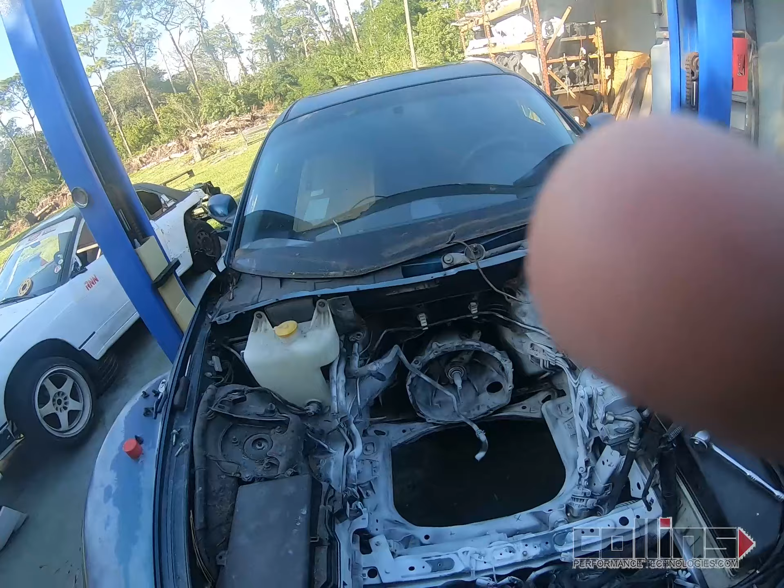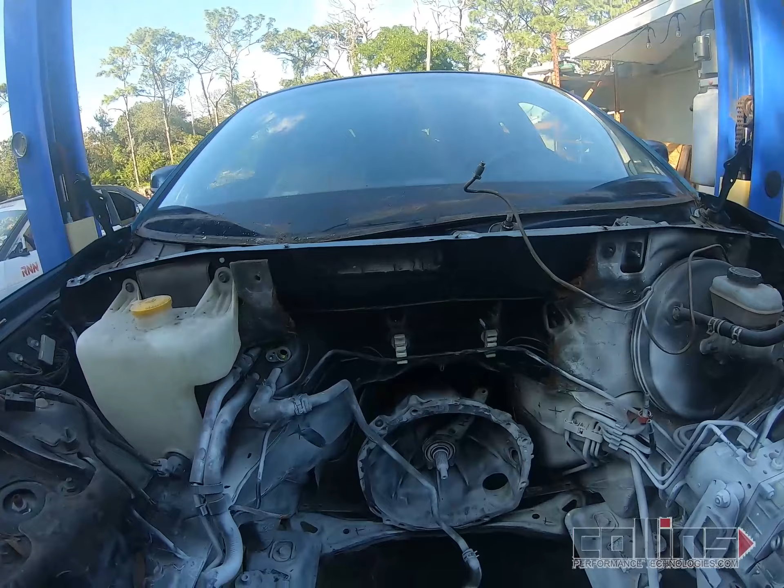All right, now that that's off, we're gonna go ahead and transition to this heater hose right here. And then once that's off, we're gonna go ahead and knock out these little guys right here and pull those off. Probably cut these studs off right here with a little wire wheel, or see if we can back them out from the other side, and then go from there. We're gonna just see how much of this area we have to kind of

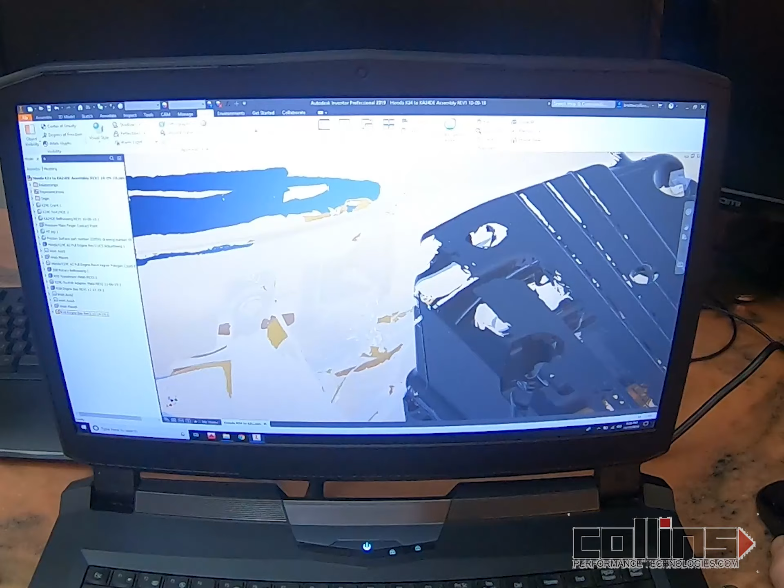restructure. This part is what I was just showing you in that last video, and the hammering of the firewall, we have to go ahead and cut. This is the brake line right here, don't worry about that. But the firewall, we're gonna go ahead and bend down, or hammer down that tab right there. We're gonna cut a little bit of it to trim it just slightly.

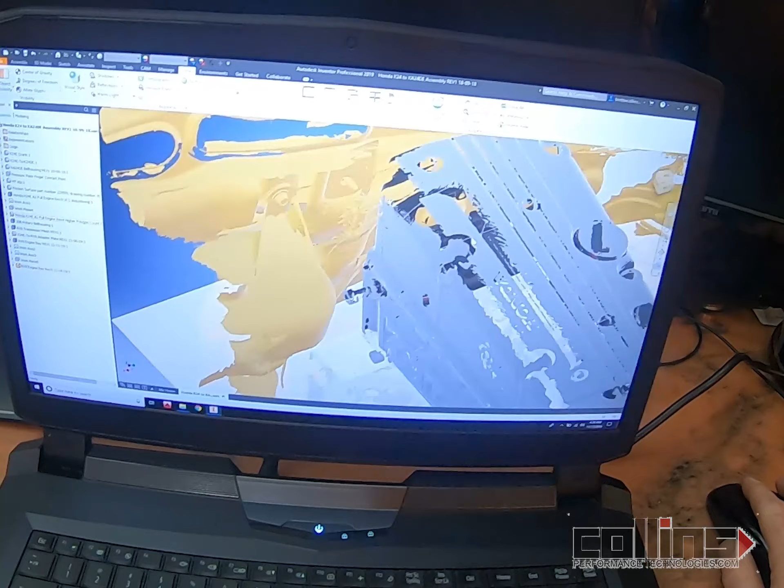We cut some of it right here on the back, behind the motor, but we didn't cut enough, so we're gonna cut a little bit more, maybe like 2.5 inches over. Once that's cut off, we're gonna hammer up and then basically fold the tab back down to kind of secure it in there and keep that firewall kind of sealed up. So once that's kind of hammered over, we'll show you how much more we're gonna have to hammer.

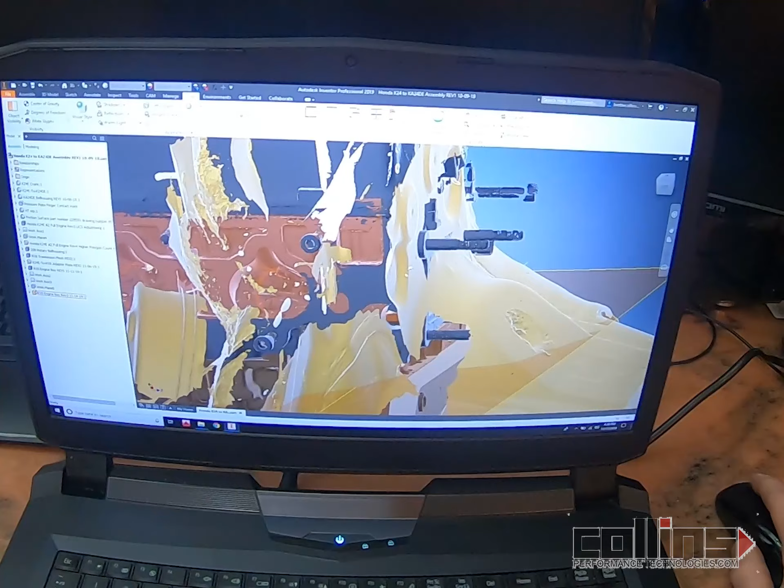So if you look back here, you can see this essentially is the surface of the firewall. We're gonna have to go in about 1/4 inch in order to get the clearance for that sensor right there. So just a little bit of hammering on the back of the firewall.

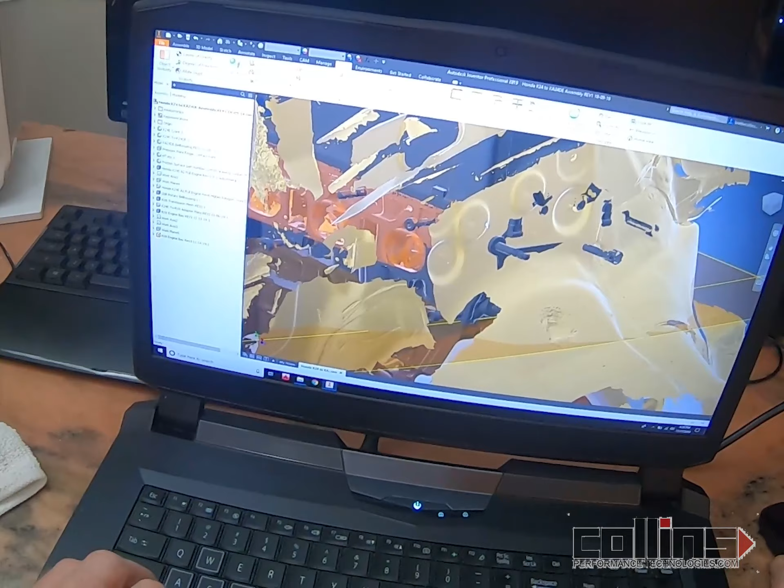This is basically a negative of the firewall. We're looking at it from the inside of the vehicle, but this is essentially the skin of the firewall. There's no thickness to this. So what you're looking at is what we have to do in order to get the sensors to essentially fit.

So just a small amount of hammering in order to get that to fit correctly, and then we'll go ahead and reinstall this whole system into the vehicle correctly. I'll show you guys what to do. All right, try to get it multiple times.

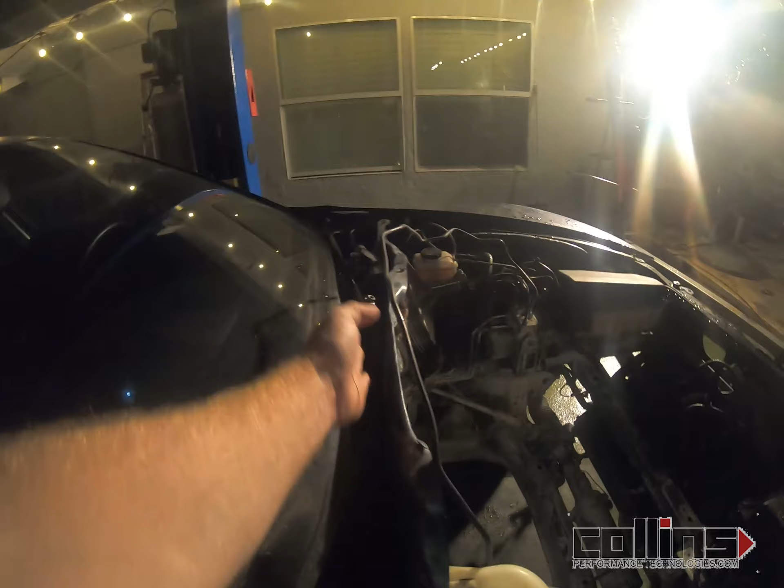It's being held up by this, this is like the wiper area where the wiper motion kind of articulates. There's also a little plastic piece that kind of goes in here to block the fresh air intake from getting water in it. It's like a little plastic piece that goes from like here to here. We're gonna try to keep most of that intact.

We might kind of get close to it, but we're definitely gonna cut this part of the chassis probably from right about here all the way over to right next to this bolt-on piece right here where it fastens on the insulation. We're gonna cut right there.

I'm gonna try to avoid cutting the brake lines, obviously, but we definitely need to go all the way down and kind of come all the way across here, and then kind of come back up, and then pull all that out. Cut the back portion of this off a little bit. I showed you in that last part where to cut. This is the passenger front brake line right there, tucking it under.

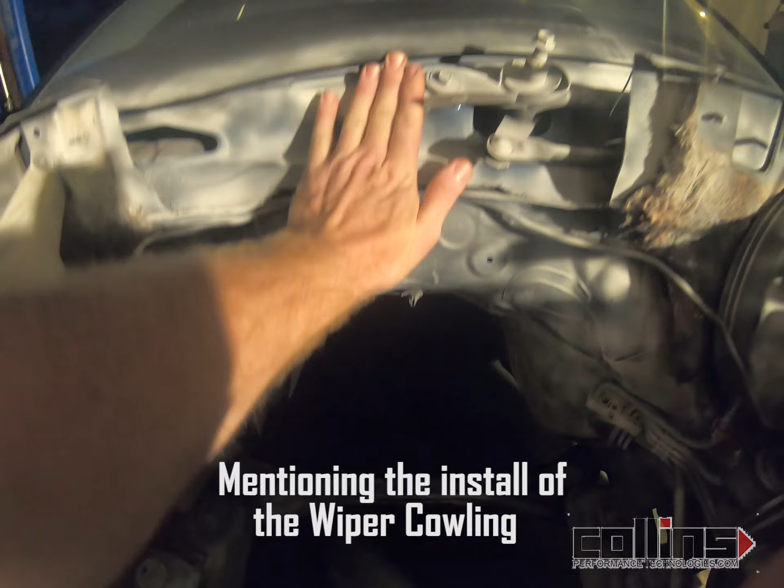When we go to install, what I notice is the top of the motor kind of hangs up right here, and it makes it really difficult to go down. It's also touching the front part of this, so we might actually cut this right here or notch it a little bit in order to get more clearance. So we might come down. I'm gonna go ahead and try to do it one more time.

I'm gonna take all these markers out that I used, and then once I go to install it and I see where it's scratching it up, I'm gonna just start removing material until it starts to go in a lot easier. And then once we have that going in a little bit easier, we'll go ahead and set up a way of how we're gonna do this.

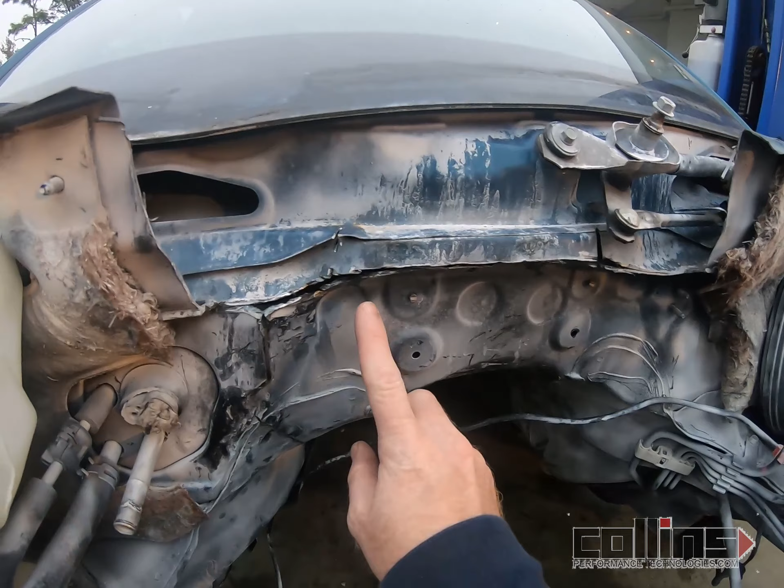I got this trimmed up a little bit better. What we're doing is we're gonna fold the bottom side here, we're gonna hammer it up into it, and then we're gonna fold this top part down over it. And we're gonna do this essentially all the way around. That way we can get a good seal, throw some seam sealer in there, and then we're good.

Basically, we're refolding this part of the front section. So we're trying to get this flat down, and we're gonna push this in, push this back just a little bit, like about 1/4 inch.

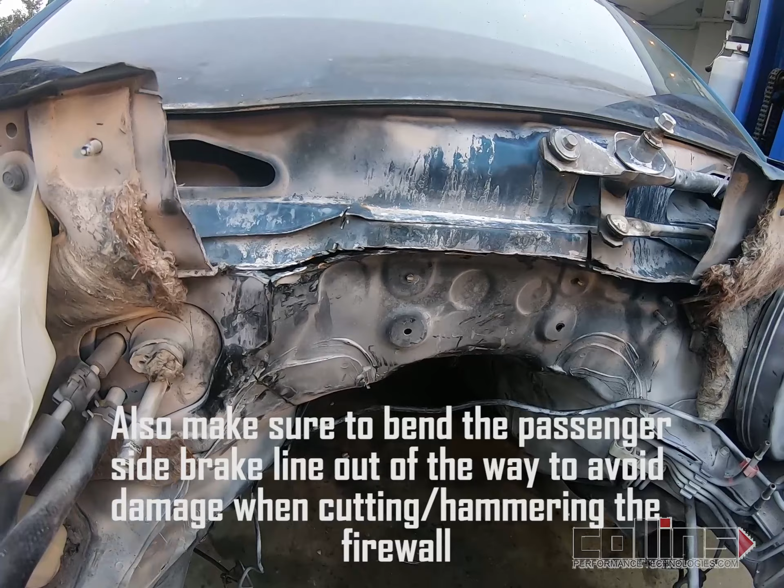If you look at that previous model, you'll be able to see I made a little score mark here with the grinder, ground down just a little bit to give it a stress relief. I didn't cut through it at all, just a little score mark, and also a score mark here. When we hammer in, it has some stress relief to kind of go back. So you'll see that once I start hammering. I'm gonna go ahead and put my eye protection, ear protection back on, and we're gonna start hammering this.

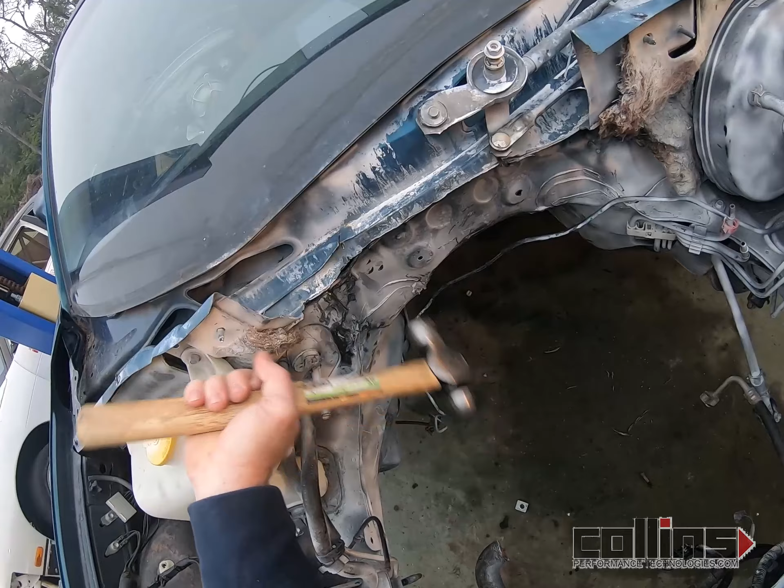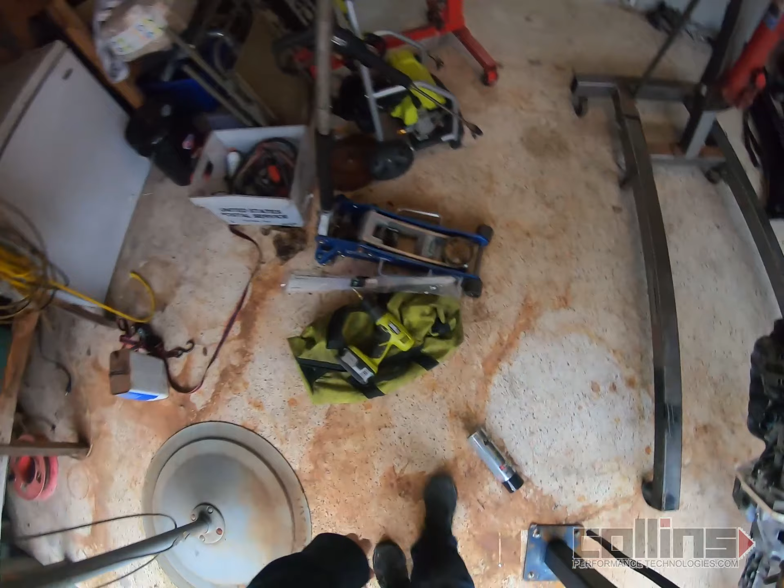Nope, no, no. Just bend this back out. A little tuna can operation here.

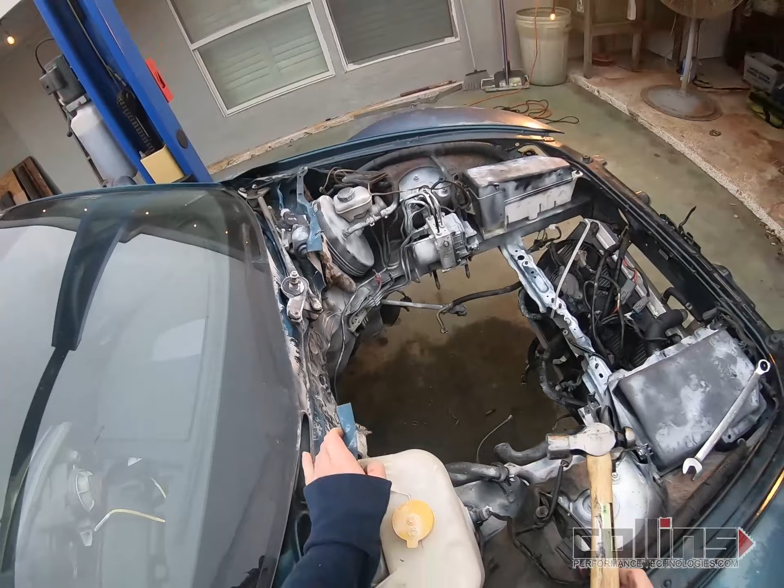Real close to where we want it. We're almost done. And then we'll be in a position to put this thing in. So, almost there. That's it.

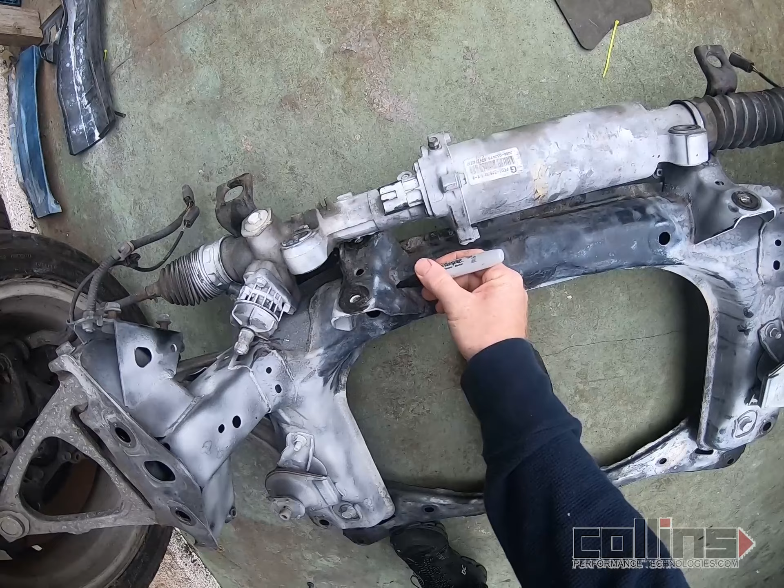Okay guys, hope you can see well. What we're gonna do today essentially is cut away the majority of this tab here. It's gonna be right down through here, and all that's gonna come off. See if I can make a good identical mark here.

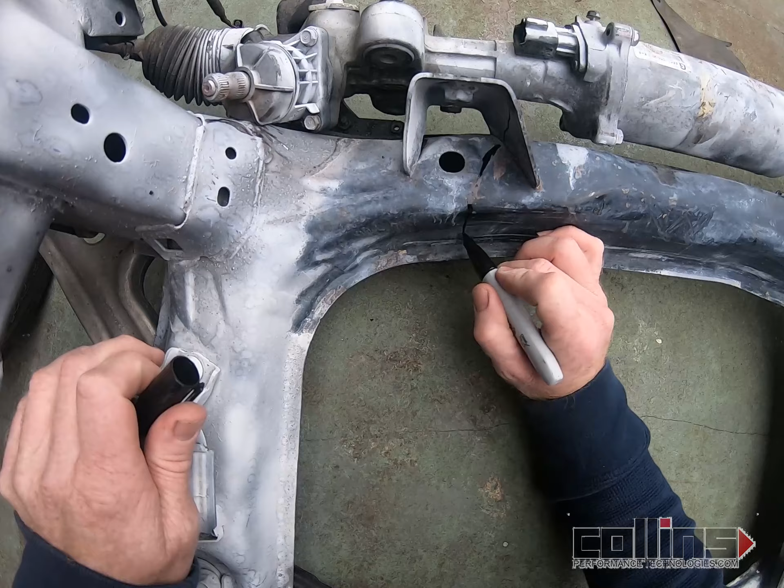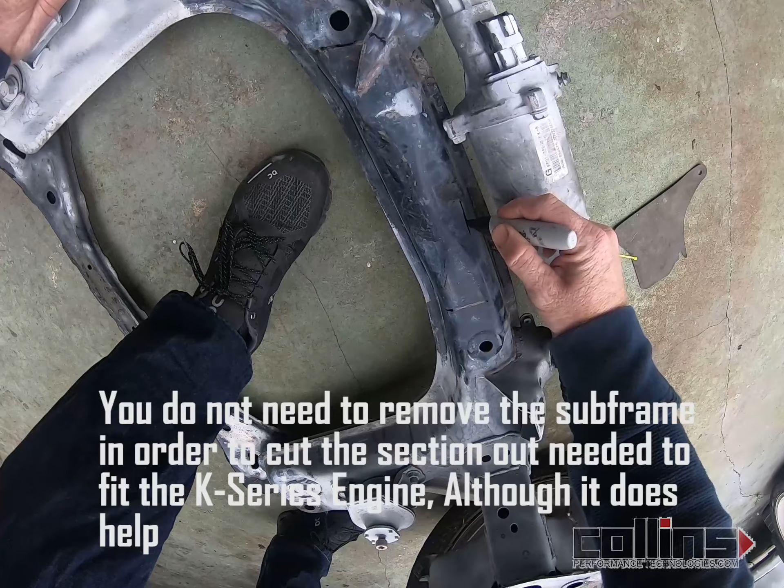Anyway, what we're doing is we're making way for the oil pan to come into this area right here. The oil pan is going to come almost all the way up to that little button right there, but it goes all the way down to here. It's going to go clear over to right about here. We're going to go ahead and take all that out, and it goes all the way forward to about right here. So it's not all of that, but we're going to take that out to show you how close it comes.

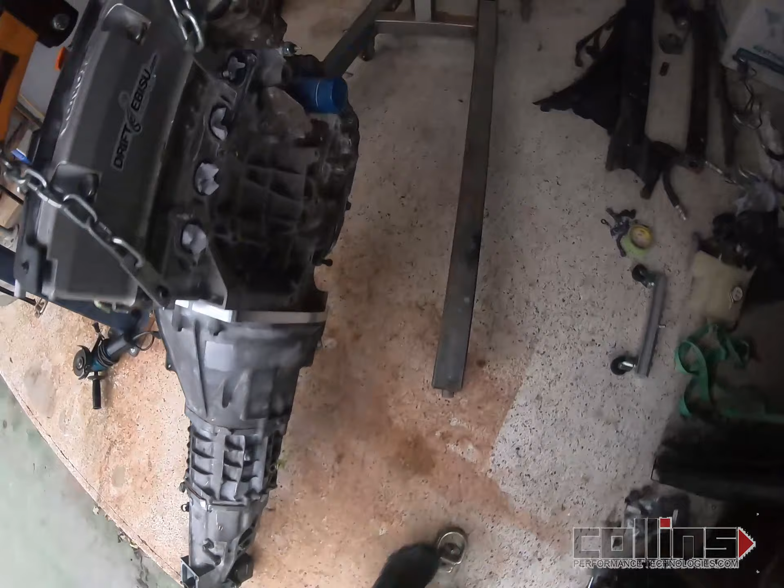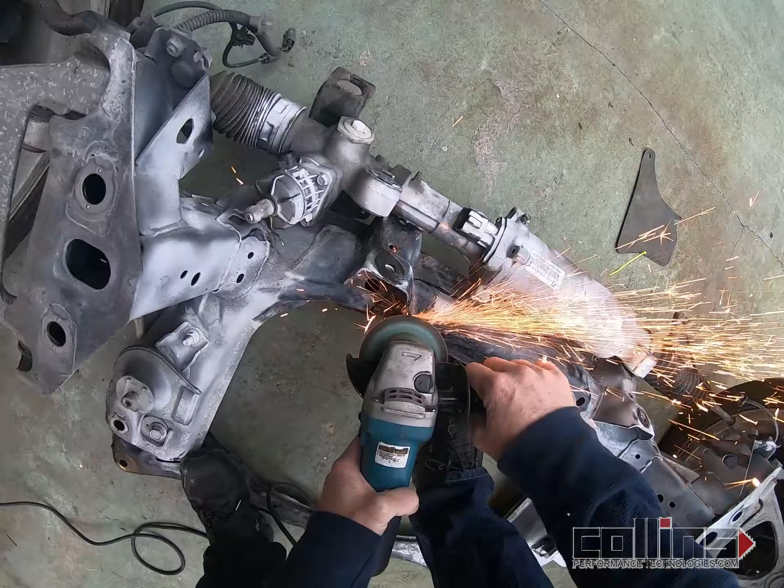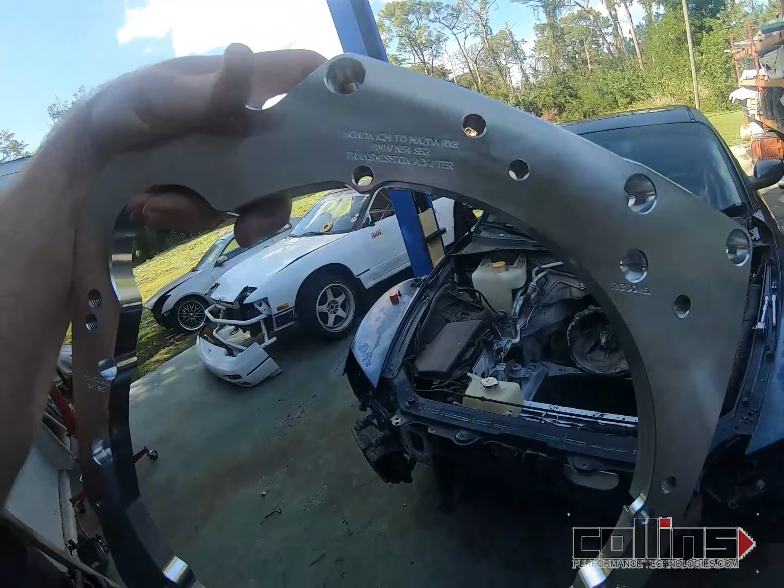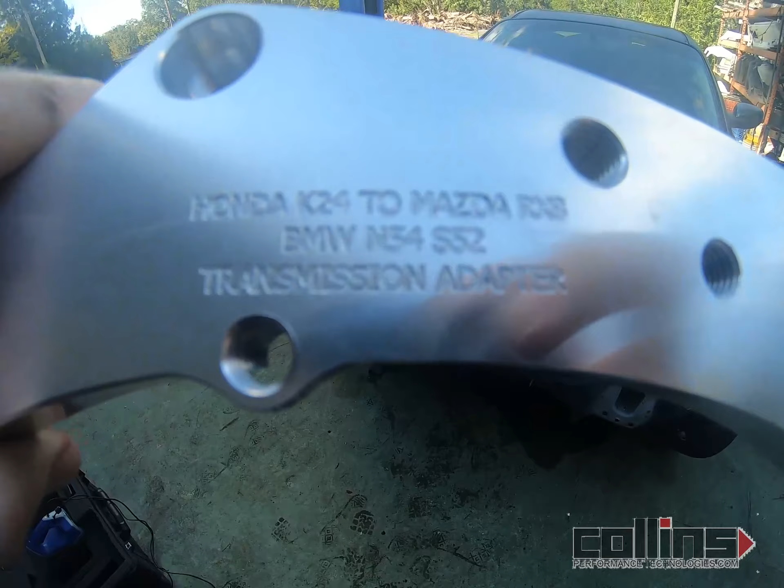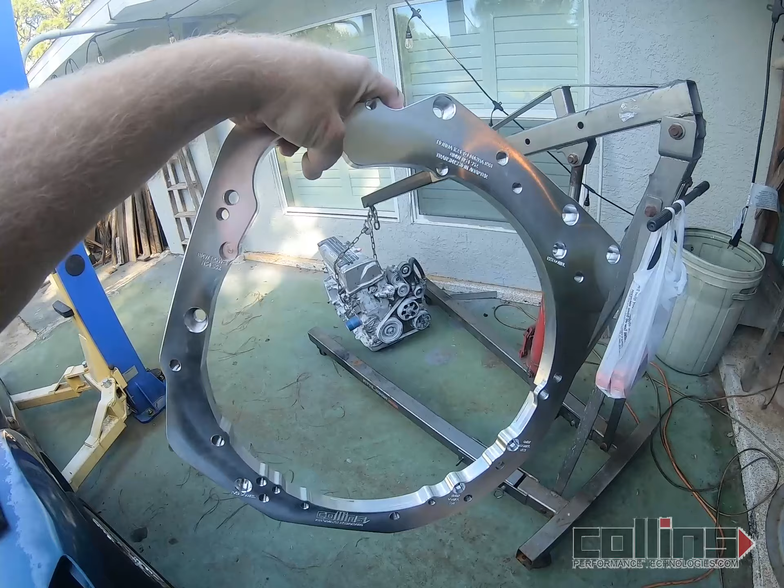In all its glory, we have the newest iteration. So this now allows another 3 transmissions to bolt up to this engine. So we got the BMW S52 and the N54 patterns on here, along with the RX8 stuff. So with that, we should have a way to do the majority of the rest of these swaps.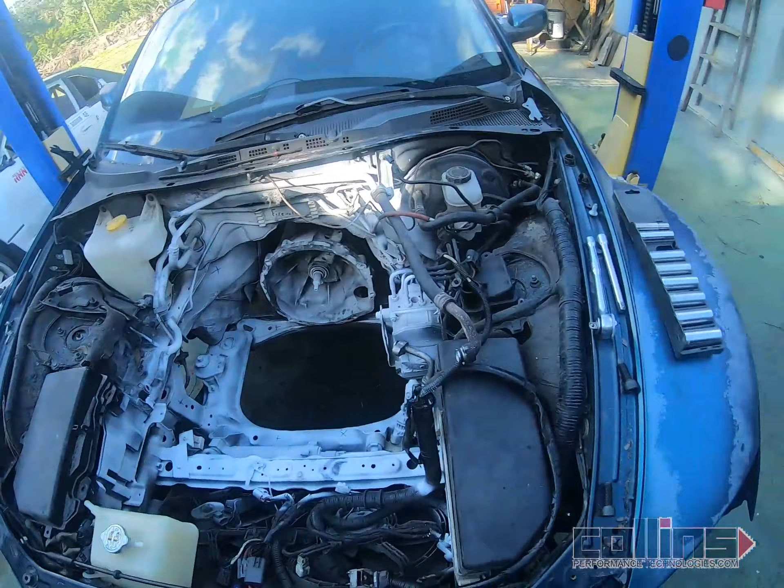So we're gonna go ahead and put this on the engine, and then pull the transmission back out, join those two together, and then we're gonna throw this thing back in here and show you guys kind of how it fits so far. Okay, so we're getting ready to drop this system in here.

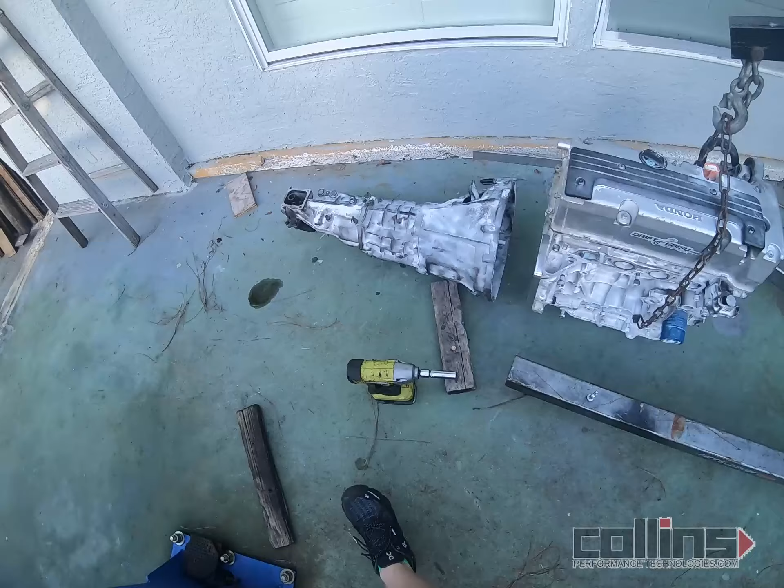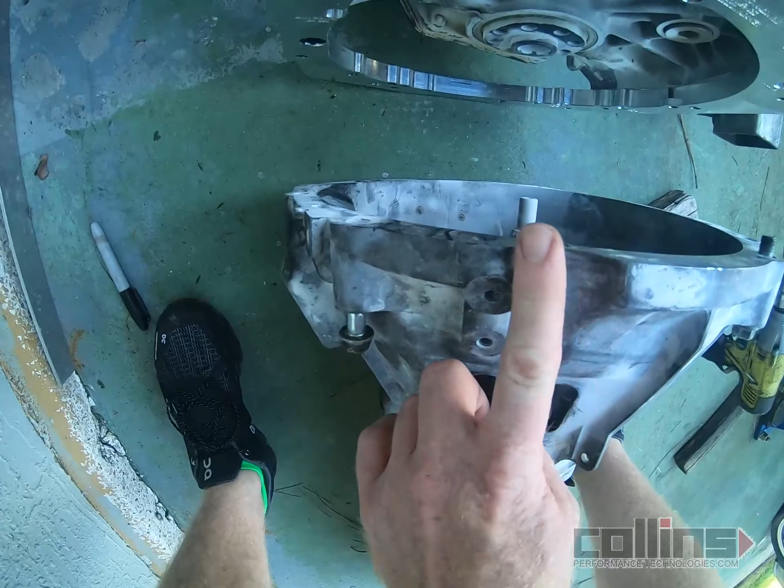I wanted to show you guys something about the modification of the RX8 transmission right here that you have to clearance for the starter. As you can see, the starter barely protrudes about 1/8 inch, maybe 1/4 inch at the most. I can get some raw data off of the 3D scan and double check, but essentially we need to remove a small section where this slave cylinder used to go right here.

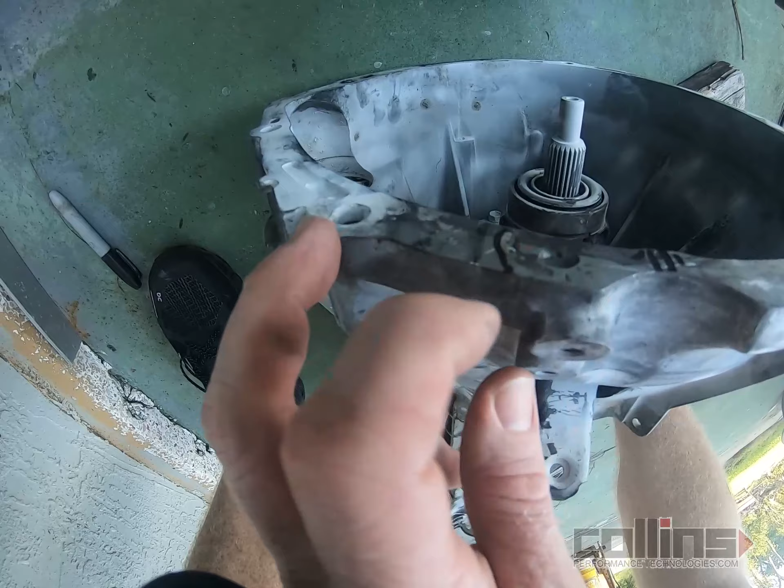There's a mark right there, like right in the middle of that slave cylinder area to about 2 inches over. It's going to be in between these two, this casting indentation right here, and then this bolt hole. There's a little mark right there that we made. So about 2 inches, we're going to go ahead and pull that surface in 1/4 inch with a grinder, and then that's pretty much it.

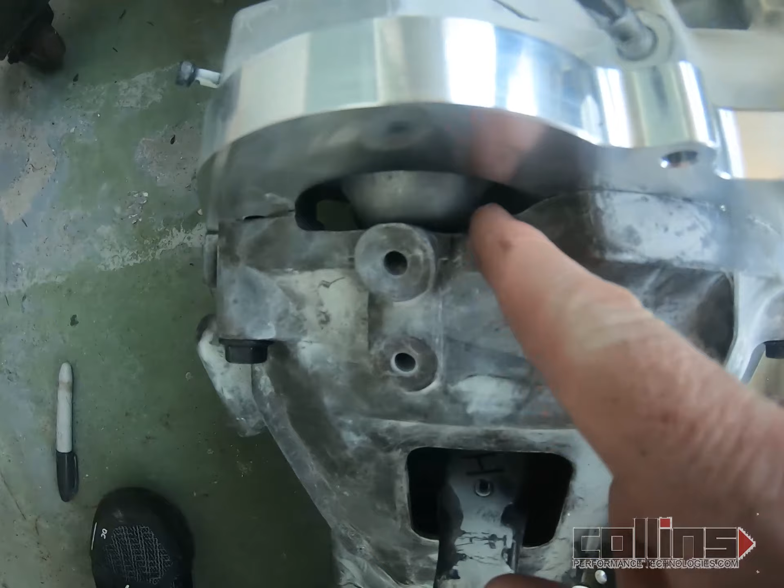All right, so we got it ground down, and I think it went a little bit too far, but if you really want to get detailed, you can kind of just curl it back right there. It's basically right at the center of this, looking down at like a 45-degree angle. It's right at the center of these two posts that hold on the existing slave cylinder, and then you just kind of feather it out.

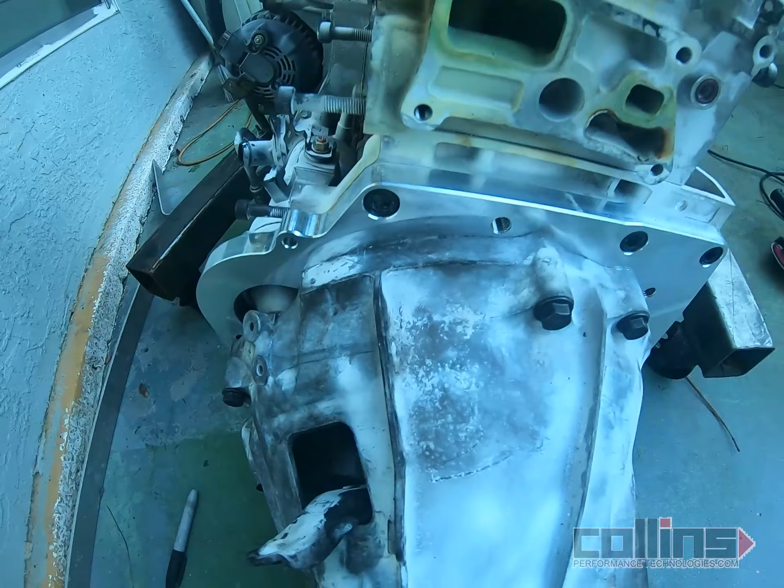It's maybe 1.5 inches wide from here, and then you just kind of come out like that, just kind of grind it in a little bit to where it recesses in there. That's pretty much the extent of that. Got all the bolts on with our RX8 bolt kit, but for the most part, this was so easy putting this thing together. We'll have a full instruction sheet on how to do this.

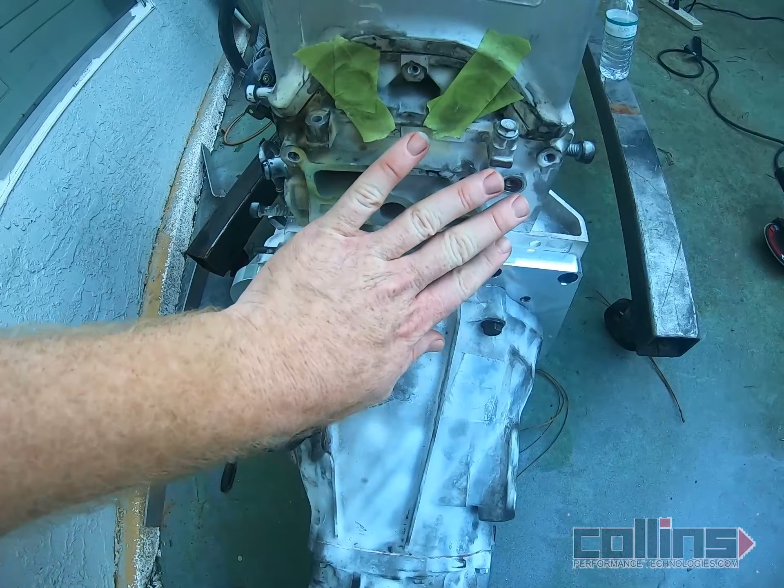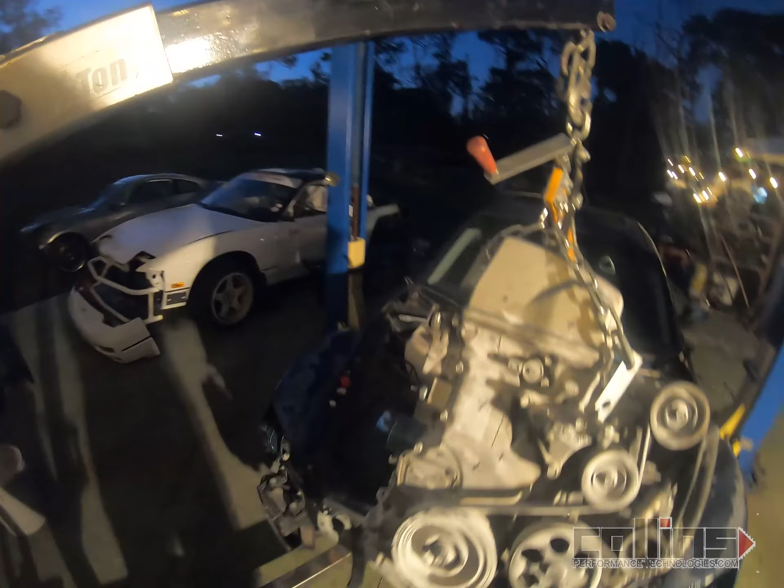Something to note, we went ahead and removed everything off of the back here. We have a temporary solution for this once we finish up the installation, but we will show you a little bit more here in a second. All right, so we mounted the trans on to the adapter plate we just made, and the adapter plate fits the contour of the trans exactly how you want it, so that you can get in there and essentially have a really nice fitting exhaust.

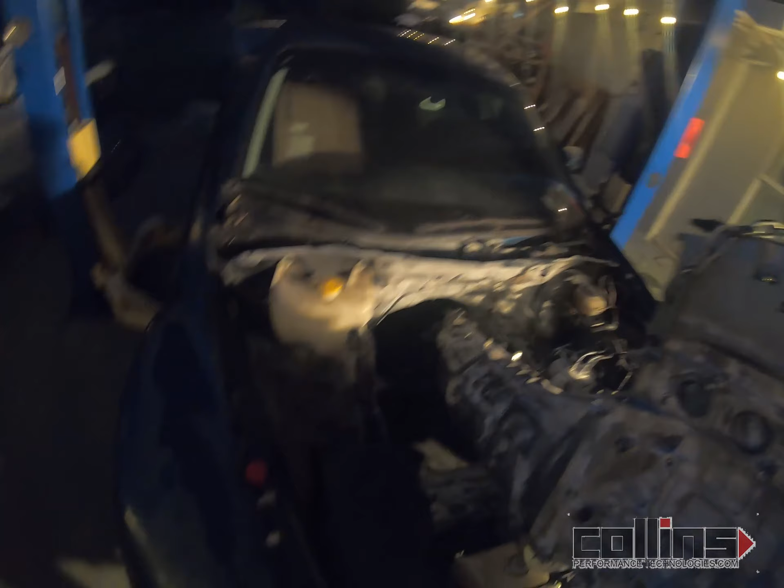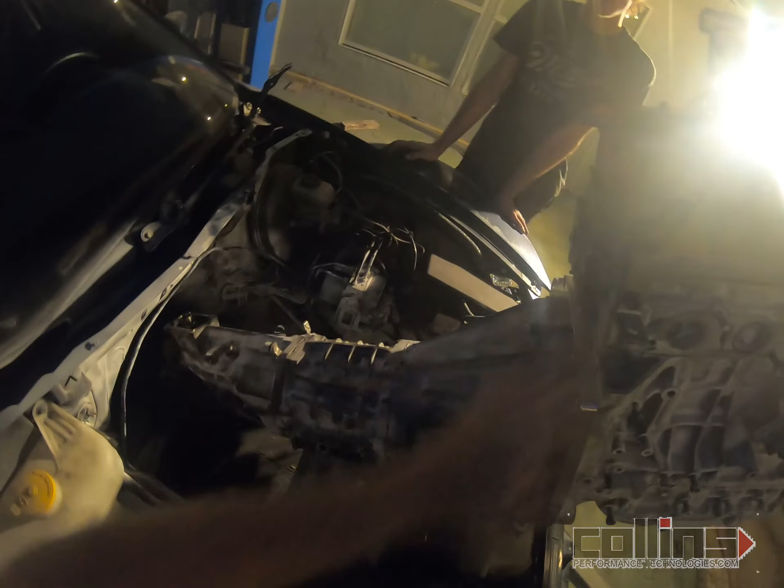And functionality is obviously number one, but we've got this nice load leveler on here, and we're going to dump it in here just to do an initial test fit. We did some computer simulation test fitting, but we're going to go ahead and show you what we saw in the computer. Again, we stripped everything off the back here just so that we don't damage it upon the initial installation.

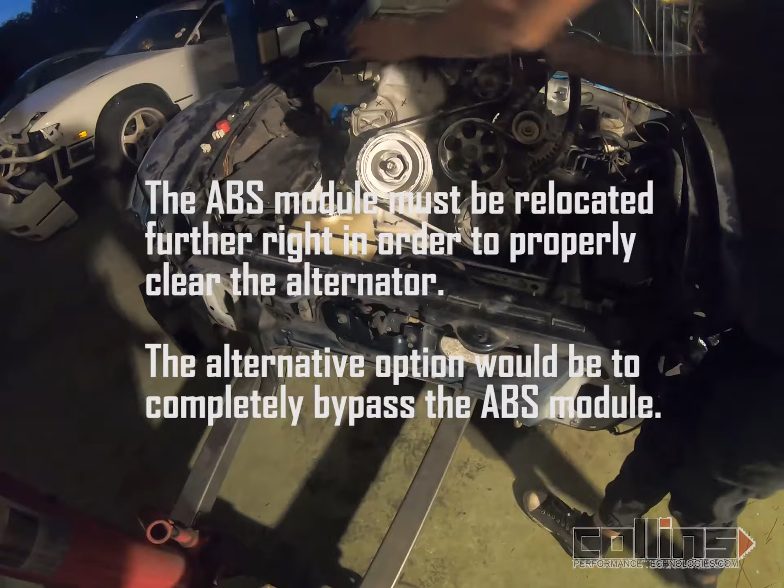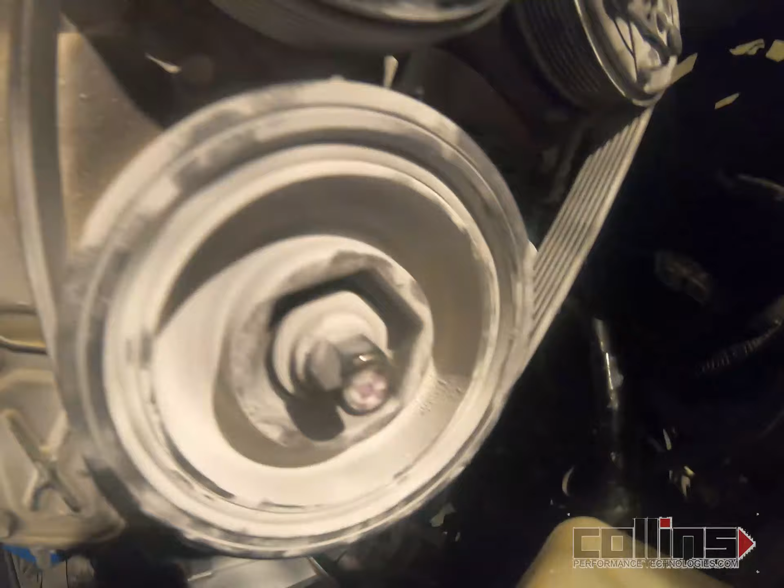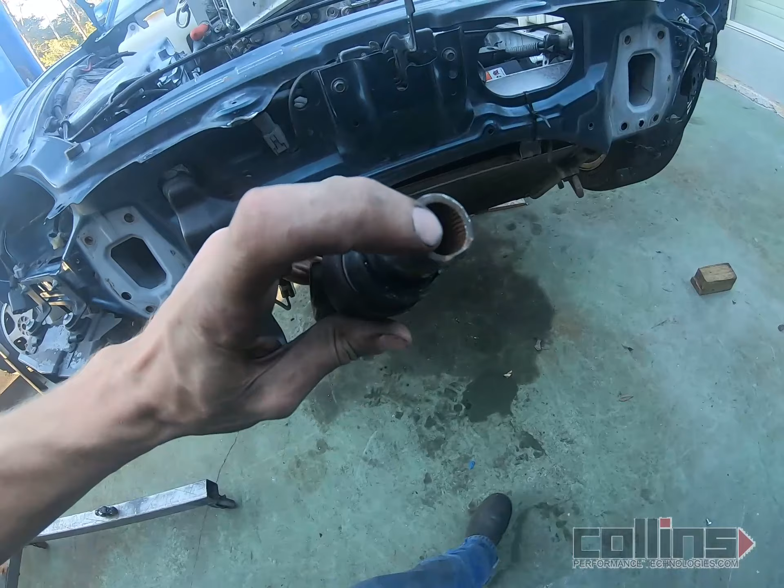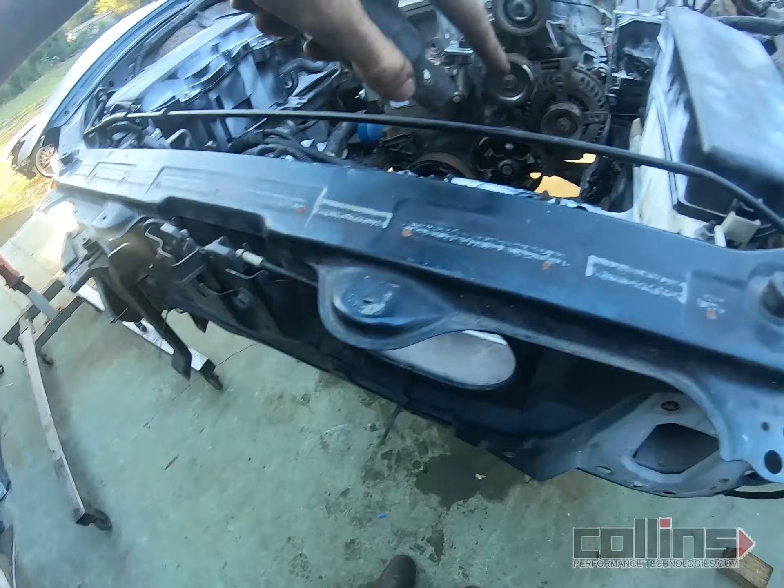Alright, so basically, the way we are going to space this rack out is this piece here is off an IS-250. You can find this online, you can find it in a junkyard. Essentially, it comes on this piece here. It's another U-joint, but right here is where that spacer goes on that Lexus IS-250, between here and the rack. Essentially, I just took a hammer and beat this piece off of that. I clamped that into a vise and swung at this with a hammer until I separated the two.

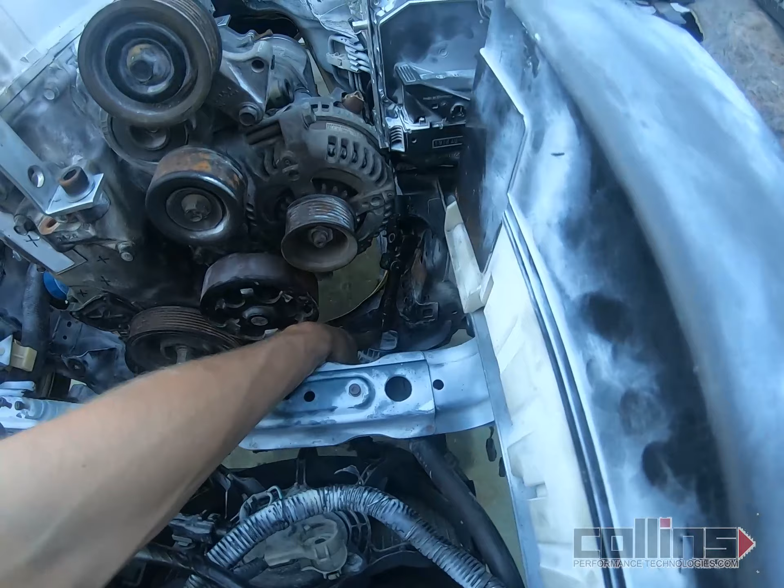If you buy them new, they'll pull right apart, but since it was so old, it was kind of seized on there. It is the same spline and diameter as the rack on the RX8. So essentially, it's a spacer so that we can drop the rack a little bit and move it forward to clear this crank pulley here.

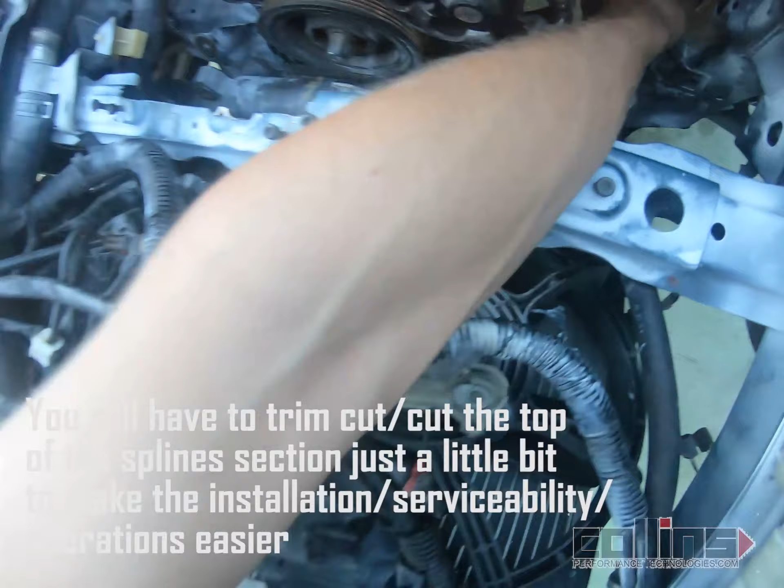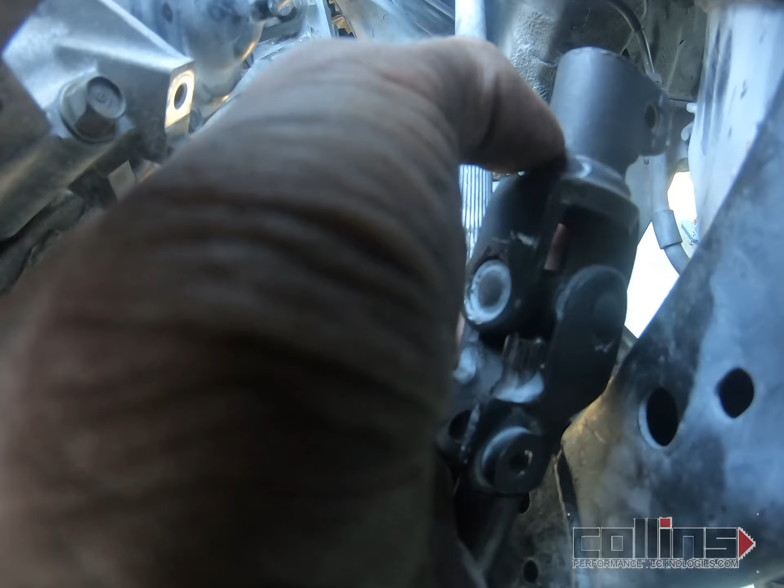So in addition to that, you will need to cut right about here. It's a little difficult to see, but you'll want to lay your U-joint up against the column on your RX8 and measure out wherever the deepest spot of the spline goes and lop the column off so you can connect the two. As you can see, it clears. An inch is as good as a mile in this case. We would like to see more, but this is how we're going to do it.

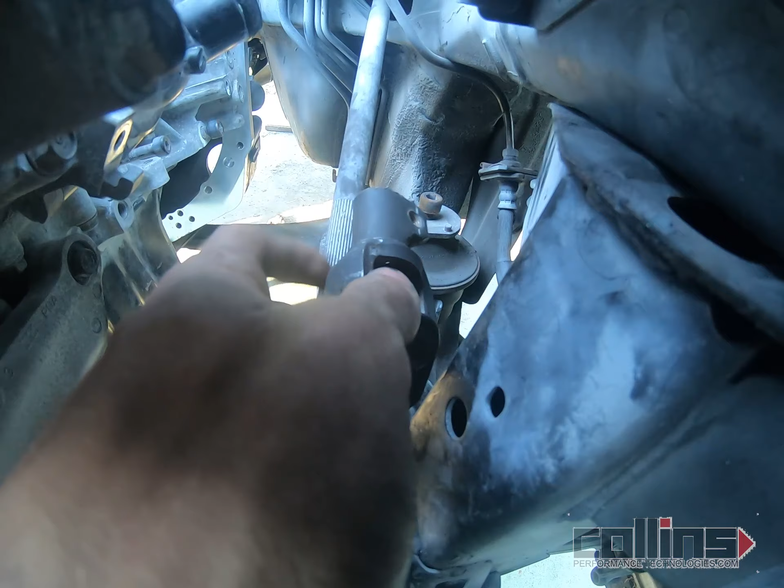Okay, one thing that I failed to mention that is rather important is that this is the factory U-joint on the RX8. Now the reason that we can't just use the IS250 U-joint that you saw earlier is that the column spline is actually smaller on the IS250 than it is on the RX8, therefore we just can't use it. So you do want to separate this off of the IS250 steering U-joint. Use this as an adapter. It is a male spline up here that goes into your stock RX8 U-joint.

This is exactly where your rack would be if you weren't spacing it down, but since we're spacing it down, you're going to want to have this extension piece in order to be able to steer. So one more time: stock RX8 U-joint, IS250 extension, RX8 rack. Everything bolts together. Splines are compatible.

The only thing that you will have to do is separate this U-joint from the RX8 rack, so that once you have the assembly put together, you can measure out where to cut your column in order to get this to all work. Also, one other thing is that this adapter piece has a groove parted midway through the splines. The reason they do this is so that you can run a bolt through there with ease, that way it doesn't bind on the splines.

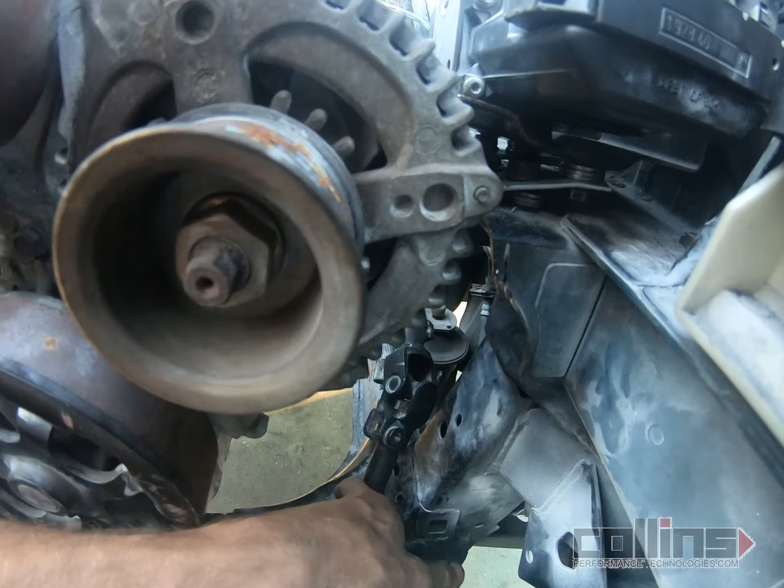We're just going to cut that off at the groove, and if we have to, we'll grind a little flat spot in the splines. We don't think that we have to, but if we do, it's no big deal. So yep, that's how you make that work.

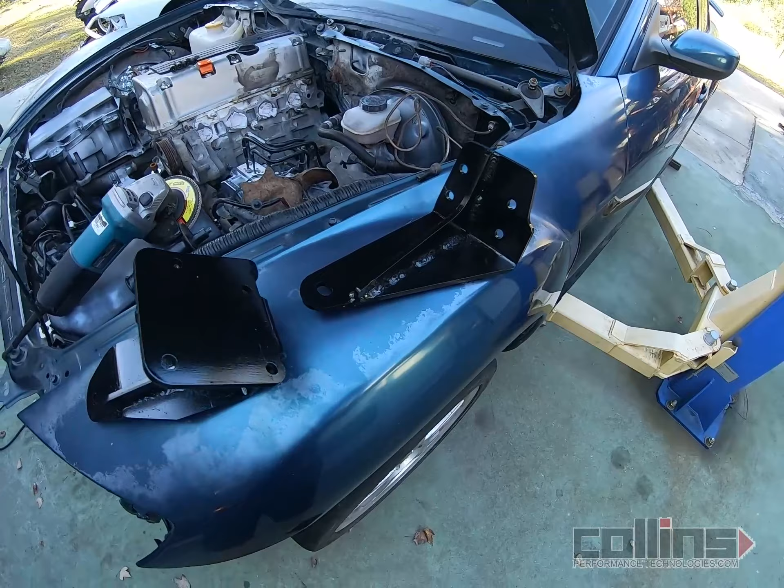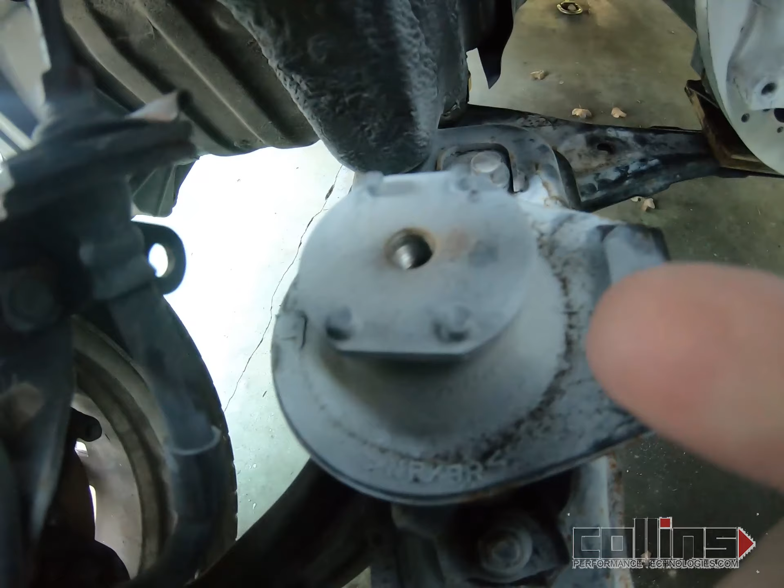All right guys, we are back and we got these RX8 mounts finished up, and we're gonna go ahead and show you guys how to install these on the K series. First step is we're gonna go ahead and grind down, I'll get the camera down in there, grind down these little nubs right here that stick out on the stock. This is a stock OEM RX8 isolator, or rubber mount essentially. It's got a little bit of play in it.

Second thing we're gonna grind down is in between these two little posts here. We got one post there and one post there. There's an oil pan fastener that kind of sticks up. We're gonna grind that hump down right there, just a little bit, and that's it. That's all you got to do in order to get these things installed. All right, just like that, they are in. This is it.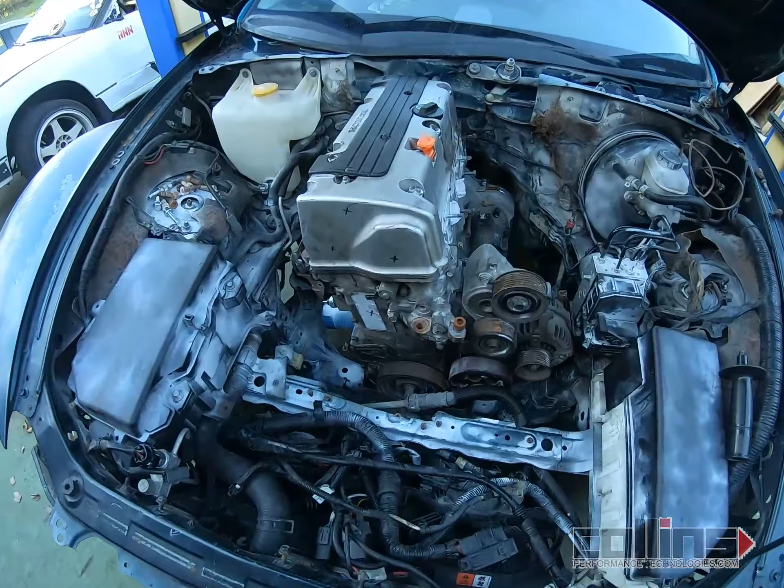Put those all in. Adapter on there. Getting ready to lower it down here in a second. Went ahead and put some washers on there until I weld on a permanent piece behind that plate. But I'm getting ready to tighten this down. I'm going to take out the little piece of wood I made to space it out while we were mocking this up. So I'm going to take that out right now and then show you guys in the air how these fit. All right, we're underneath.

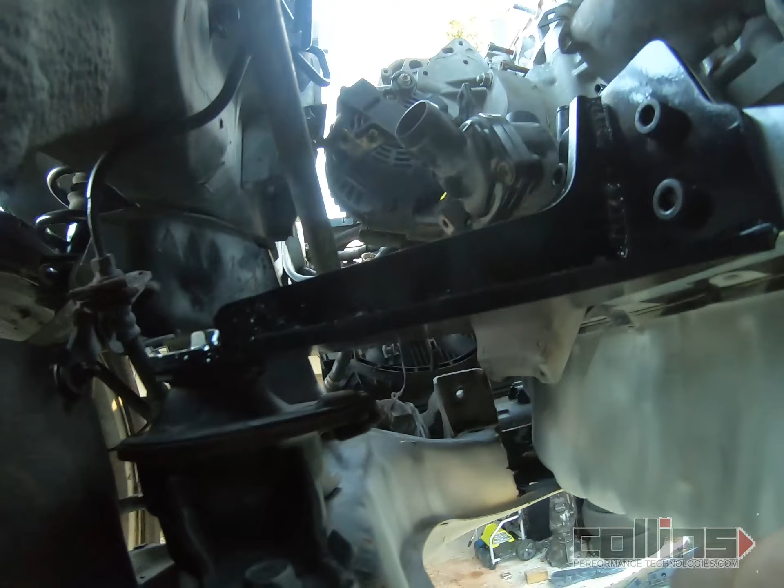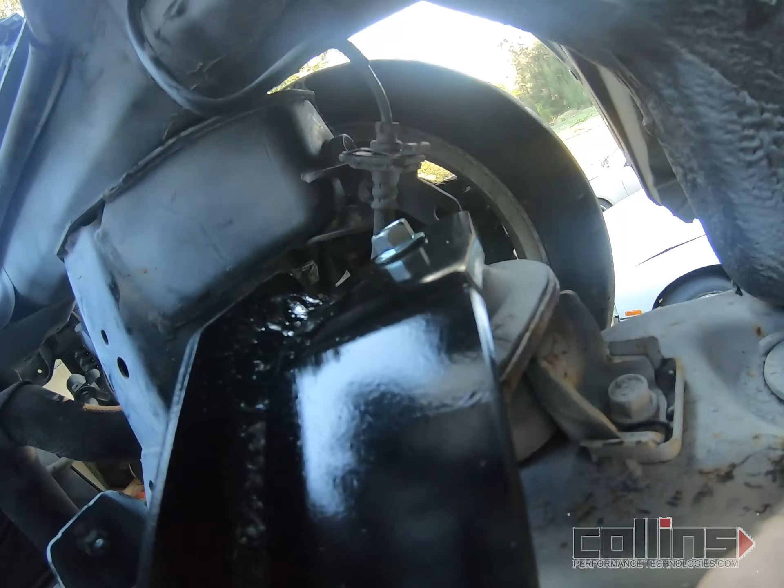You can see gaps underneath there. So this is underneath, it's installed. Give you guys a better look at what we're working at here. So made this little adapter right here to get it to fit onto the block real clean, and then get this mount essentially right there finished up. Anyway, fitment's pretty dialed in. Went in the first time and just really happy.

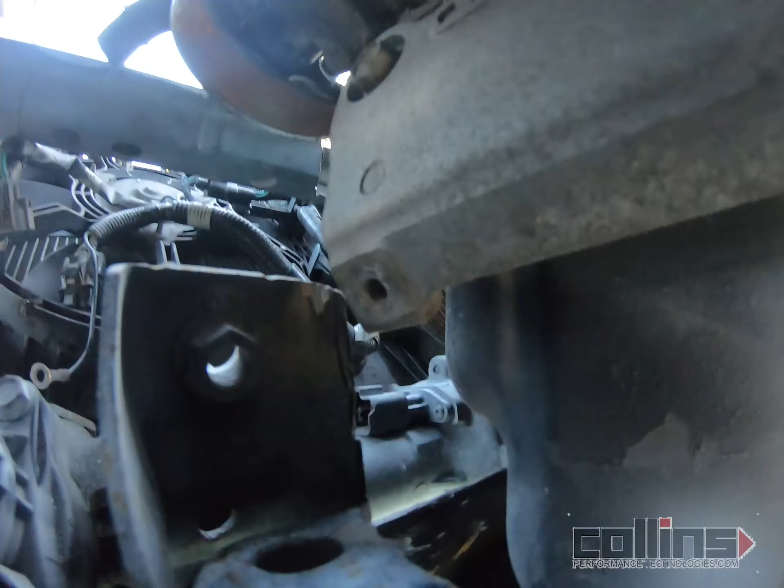You definitely need to notch the bottom cross member subframe in order to get this to fit in. We had to remove the AC, and this doesn't hit right there. It's really close. But the next thing that we got to do is relocate the rack, and then we'll be finished up. And then get the subframe reinforcement welded in and get you guys happy on that. All right, guys, stay tuned.

All right, so now you can see the assembly together. We have this cover, the power plant frame, all assembled. The drive shaft is in. You can see up there. It's a little difficult to see. The drive shaft's in, power plant frame bolts up. This cover here for the drive shaft, protect that, that's all covered up. Everything bolts together. From the engine back, everything's great.